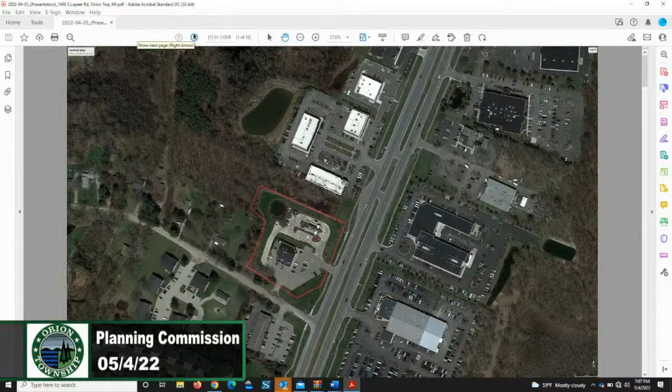Adequate public service: because we are not proposing any expansion or increased use of the building, it's just adding a drive-through window to an existing use. We don't believe there will be any uptick in demand for any of the existing utilities that service the building. Impact on traffic: we're adding the drive-through to this site, but it's an existing coffee use, so we don't believe there's going to be a significant increase in traffic. Once we get to the site plan, there's a traffic impact statement we are preparing, but we don't think it'll be a large uptick in traffic.

We've also designed the site to hold a significant amount of stacking spaces, even though we don't anticipate a ton of stacking. Generally, we have 11 within the lane, but this site could hold 30 if need be before it even gets to any right of way.

Enhancement to the surrounding environment: I wanted to share these pictures showing the site and the significant landscape buffer west of our site. This is a visual from South Lapeer Road looking west. We'll be maintaining that existing buffer so neighbors further west won't be able to see the drive-through lane whatsoever. This is another view from Casimir. We'll be adding a few landscape islands on the site to enhance the environmental aesthetic.

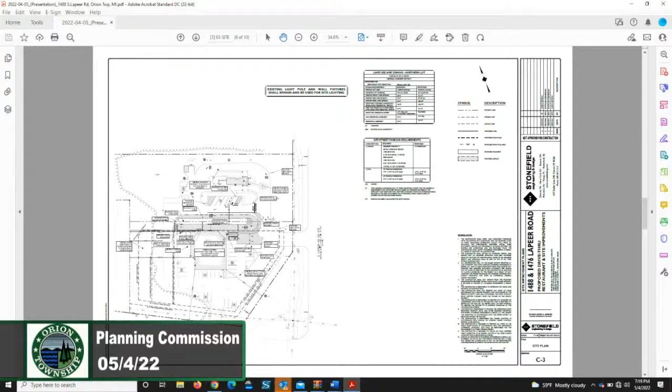What we're anticipating is these users peak at different times for parking demand. Generally, the coffee shop will be busiest in the morning, around 8:30 to 10 o'clock, as people head to work, while the Coney Island and pizza place will be busier at lunch and dinner times. The dog groomer in the middle is a low traffic and low parking demand generator, but fairly steady throughout the day. That's why we believe the 6 spaces we are short will not hinder the site from a functionality standpoint.

Comment 7, the maximum height of the building will be included. Just a point of clarification on comment number 7: both parcels are under the same ownership, so we will be able to get the easement for cross-access, allowing the southern property to circulate through the northern property and vice versa.

Truck turning exhibit - this came up on both the Giffels-Webster and OHM review letters, and I'd like to point out a few things. This is a truck circulation exhibit for an F-150 Super Cab, the largest F-150 they make. If you notice in this area, there is a slight overhang for the truck to make that turn. We would like to keep it as is, because reconfiguring it and pushing the striping further south would eat into our parking.

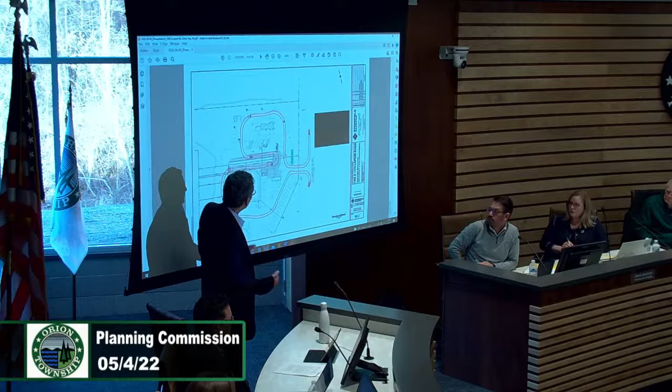The other thing, if you don't put an island here, if I'm coming in here and I know there's a drive-through, what am I going to do? I'm going to drive right through here, and someone's going to be coming into this queue that would have gone all the way around. They're looping around doing the right thing, and this person comes and just cuts them right off.

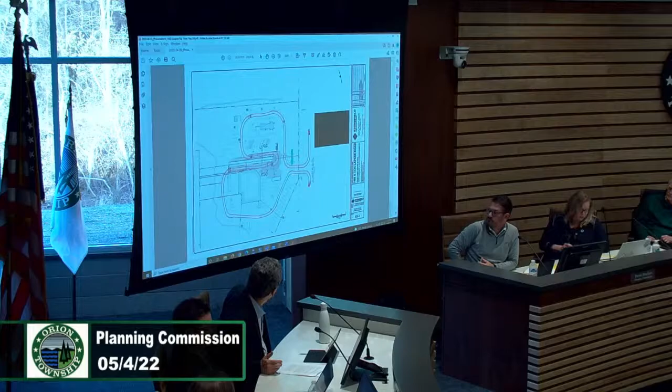It just doesn't seem like the type of operation for a drive-through that is customary, but I think it's solvable. I think some redesign of this could modify the turning radius, add the island. I don't think it kills the project. I think it's just some minor modifications that would improve the flow and also improve the landscape screening, and we think potentially enhance safety in the area.

Now, under Planning Commission waivers, some of these are waivers, some of them are discussion items. The parking spaces is one. The other deals more with a discussion regarding the landscape standards, whether you feel that all the standards are met. A lot of things aren't being changed other than some of the trees that are being removed for the drive-through and the need for screening, but that's just something for your discussion.

Then number 12 on our item talks about the 2 lots used for circulation. This requires your approval. And then finally, special land use standards that are included. Those, in fact, should be reviewed as part of your deliberations to determine whether or not this proposal meets the special land use standards that are in your ordinance.

So that's a summary of our comments. I'll be happy to answer any questions. All right, thank you very much. Would like to turn it over to OHM for their review.

Thank you, Mr. Chairman. Our letter of April 27th came to the similar conclusion that the plan was not in compliance with the township ordinances and engineering standards. We did list out 12 items that needed to be addressed. I'm happy to hear the applicant is willing to address all of those, 2 through 12.

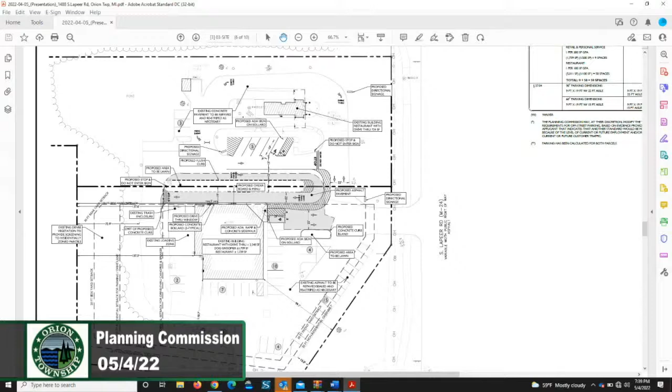I echo similar concern of the current traffic flow pattern around the building. I understand it's an existing location, and everyone here, including the developer and the occupant, is trying to look at the least impactful improvement to add a drive-through. Although I still find it necessary to provide similar stacking to all other drive-throughs in the township, because even though there isn't traffic data specifically for Lava Mountain Coffee, we've seen plenty of other locations where inadequate stacking creates detrimental traffic patterns we want to avoid. So that's a huge issue for me right now.

I would much rather see a permanent island provided, so you gain additional stacking spaces that allow the proposed signage to be moved out further, creating more wait time between order and service if desired. Since traffic patterns on that site already go to the right to support the Coney Island, I don't see a major issue with having the coffee area follow the same sequence, and then providing an adequate turning radius.

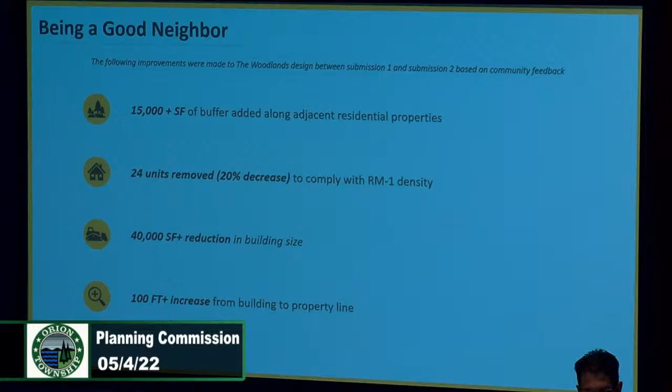So this led us to continue to listen and improve our plan, and we have worked very hard to do so. In our most recent revision, we have added an additional 15,000 square feet of buffer space. This is specifically along the west side of the property line. This was our smallest buffer before - it measured only about 11 feet, and we've quadrupled that buffer to be a total of about 40 feet now.

We've also relocated 32 of our units to the east portion of the site, moving some of the residential closer to Lapeer Road, closer to that high traffic area and away from the residential uses. This was a specific aspect of our redesign that was well received by board members. We've also reduced 50% of the building footprint to 2 stories, so I have a lot of detail on that, and I will come back to that in a moment.

While we were very excited to bring a restaurant to Orion Township, we understood that added some complications, specifically creating a significant amount of traffic. Traffic is a very important topic and a big concern of both the Planning Commission and community members, so we decided it was in the best interest of this project to focus on what's most important to us and what we feel is the most important need in the community, being residential housing. So our newest proposal is purely residential, and we've eliminated that restaurant.

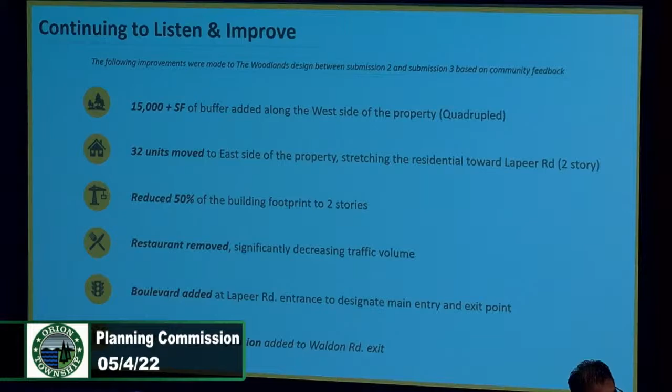We've also added a boulevard at Lapeer Road. This designates this as our main entrance and exit point, so as to keep traffic flow moving towards Lapeer as opposed to Waldon. Furthermore, we took the Waldon Road exit and made it a right turn only, so no traffic will be moving from exiting the property toward the Lapeer and Waldon intersection. Any traffic exiting onto Waldon will be making a right turn moving away from Lapeer.

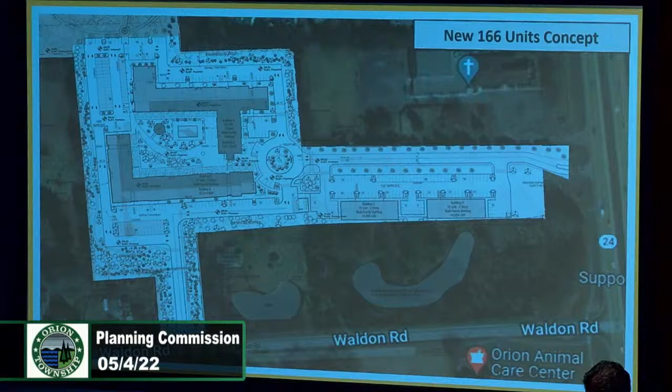As I mentioned, Woodlands has the appearance of 2 stories from its surroundings. The way we accomplished this was using the design you see on screen now. On the outer perimeter of the building, we added the 2 stories, and that connects to the 3-story portion through a large pitched roof, which effectively shields the entire 3-story portion from all the surrounding areas.

The only way the three-story portion is visible is from the interior courtyard area to the rest of the development. None of the neighboring properties will view that three-story aspect.

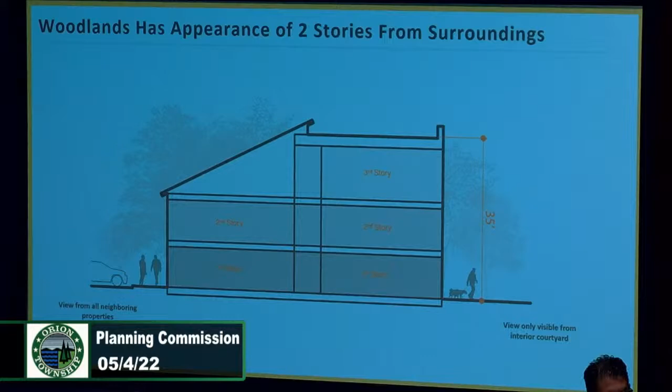This is a 2.5-story design, and it's 35 feet tall. The rationale is that 50% of the building is 2 stories and 50% is 3 stories, and so without a clear definition in the zoning ordinances that we're aware of, this is considered 2.5 stories.

But what does that look like in real life? What we've identified here is a rendering of what the 2-story side of the building will look like to all surrounding areas. As you can see, there's really no visibility whatsoever of a 3rd story.

This entrance here is from the end of the Waldon Road entrance, so this is already 350 feet off the road, looking directly at the building from the entry point. This would be the vantage point.

From all the neighboring properties, there's a 5-foot-high buffer and a significant amount of landscaping added to those areas. So if you could even see through all that, this would be your view of the building. We feel this mass and scale is much more conducive to the area than the previous 3-story design.

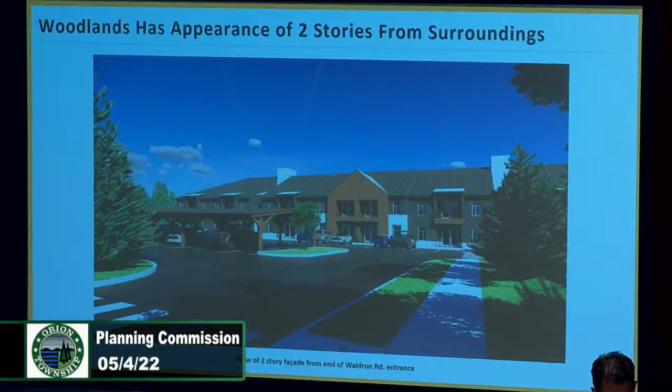The look and feel of the Woodlands is something we're very proud of. In the upper left rendering, this would be the view as you enter from Lapeer Road. This driveway is about 750 feet long, so it's more than 2 football fields going from Lapeer Road into the Woodlands. You can hardly see the building from the road.

As you're driving in, the 2-story buildings I referred to would be to the left. The rendering in the upper right corner depicts those buildings. As I mentioned, they are adjacent to the nature area and the detention pond to the south, and they provide the same finish quality and access to all the same amenities, but it's a slightly different product. So as opposed to a common hall elevator building, it is a 2-story walk-up building, which gives a little more versatility and flexibility to the development compared to the previous design.

Once you get to the end of that 750-foot driveway, you're greeted by the roundabout circle there. Behind that is the main leasing office, amenity space, and then connected to the 4,000 square foot outdoor amenity space just beyond the building.

And if you were to drive into the development from Waldon Road, what you'd see is what's in the bottom right corner. At this driveway, we're about 350 feet off of the road, so again, over a football field away from the entry point, and as you're driving in, this vantage point of the building is 2 stories.

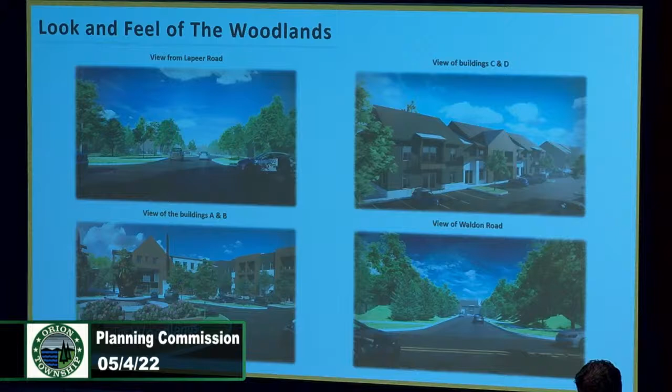As mentioned in some planning reviews and at previous meetings, we haven't given a lot of detail on what the exterior facade materials of the Woodlands will feature, so we wanted to do that tonight.

The brown and charcoal colors that you see are a natural wood grain composite siding. This is a really tremendous product called Diamond Kote, made from aspen pine. What's unique about it is that it's one of the most durable wood materials they can create composites from. It starts at about 4 inches thick, and they compress it down to just about 3/8 inch. It's much more sturdy than fiber cement board and a lot more durable, so it's extremely high quality.

It also comes with a 30-year no-fade paint guarantee, meaning they use mineral-based paints so over time there'll be no sun fading of the facade color. Again, very high quality, very durable material, and we think it gives a really great aesthetic to the building.

In addition to the natural wood grain composite, we've also included some stone accents to break up the facade and give it a bit more depth. We're considering Fond du Lac natural stone for this portion of the building. Also wanted to mention that nearly every unit in the Woodlands does feature a balcony—there might have been some confusion at our previous meeting that there were no balconies, but nearly all the units do have balconies with railings like you see in this rendering.

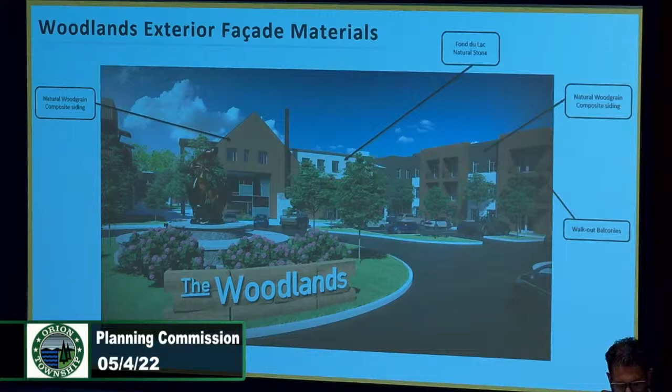We thought it was important to update our shadow study following this latest redesign. With 50% of the main buildings being 2-story, it further reduces the shadow created by the building to the point where it's almost unseeable. As a result, it shows that the Woodlands creates no sun screening on adjacent residential uses, regardless of time of day or season. That was a concern some of the public shared at our public hearing, and we wanted to make clear that shadows should not be a concern with this development.

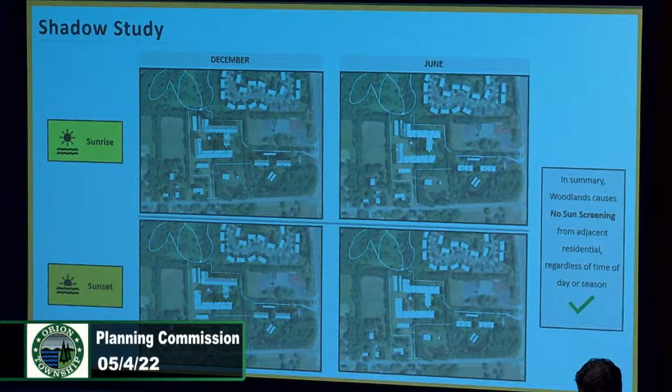There's also been some concern that the Woodlands overburdens public infrastructure. This was something we shared last time, but I don't know that it was fully understood in terms of what we were saying, so we wanted to provide a bit of a visual here.

First, beginning with stormwater management: we had Stonefield Engineering conduct an analysis of the existing conditions of the site compared to the developed conditions, and what the water discharge rate looks like in each instance. In the developed case, there's an 80% reduction in the discharge rate of water from the site. The reason is the current site has roughly a 3-foot grade fall from the north end of the property to the south end. Being natural land, water flows wherever it pleases, and the path of least resistance is toward the houses on Waldon Road to the south.

That could certainly be leading to some of the flooding issues that adjacent properties are currently having. In the post-developed environment, we're creating a largely flat surface utilizing a stormwater management system and a retention pond to manage the water. So the water goes from flowing wherever it wants to going through a stormwater management system and being discharged into the retention pond and eventually into the city's stormwater management.

As it relates to water and sewer capacity, it's been confirmed by the township's Department of Public Works that there is adequate capacity in both sewer and water systems. In that respect, the development poses no threat to those systems.

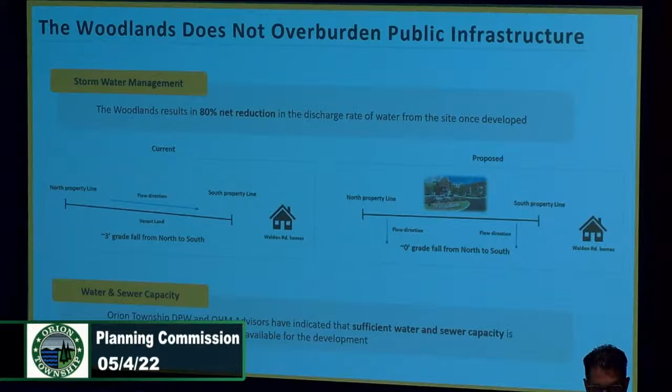Traffic has been a highly discussed topic about this project. Our latest design reduces the amount of traffic proposed compared to the original by 60%. The reason is the original design had 190 units, a 4,000 square foot restaurant, and a 14,000 square foot office building. When you add in all those different uses, you get a much higher total amount of trips compared to a purely residential use.

In the case of the original proposal, our total AM and PM peak traffic was 383 trips, compared to the new proposal's 154 trips. So compared to the original amount of traffic volume, we've reduced that by 60% with the new proposal.

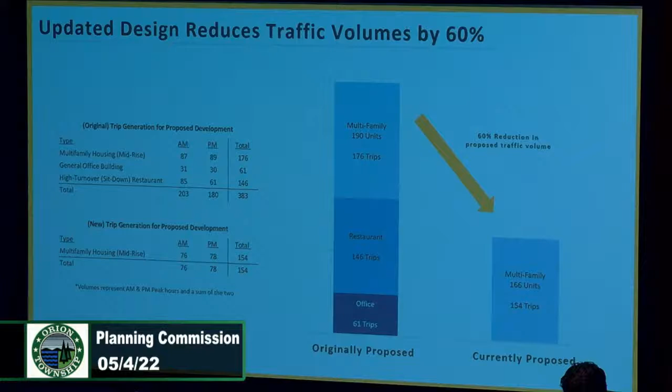When we take this a step further and compare the proposed amount of traffic to what's currently approved on the site, it's actually less than what is currently approved. The conditional rezone that provides for the restaurant and the car club or office building creates in total 61 trips from office and 146 trips from restaurants, while the current proposal with 166 units only produces 154 trips. So we're actually reducing what's currently approved on the site by about 34%.

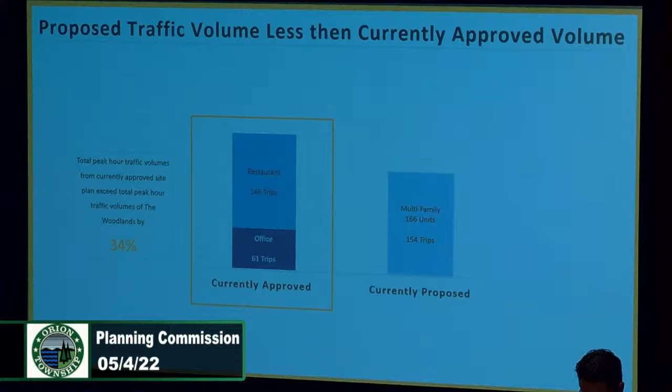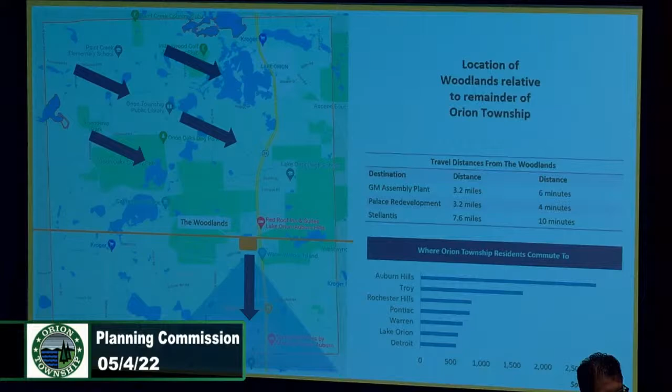We mentioned this last time, but we'd like to reiterate that we feel the location of this project is actually a strong benefit to the site. While other sites could feature multifamily elsewhere in the township, further north, the Woodlands sits immediately adjacent to Lapeer Road, the busiest road in Oakland County, and everyone goes south to work. By locating the Woodlands in the lower third of the township, we're preventing hundreds of cars, 154 cars in this case, from needing to go through downtown or other already congested areas. They get to head straight south from Lapeer Road on down, so we think this is actually the perfect location.

As it relates to existing supply, we all know it's full, and since the last time we were here, it's even more full. We just checked this today before coming in, and there is not a single apartment available at any of these 6 locations, according to apartments.com, as of 4 o'clock this afternoon. None. The first one available is in June. Apartments are tremendously important to the further growth of Orion Township, and the Woodlands delivers exactly that.

The other thing the Woodlands does is bring a new product type. I want to reiterate this because there is nothing like this in the township. It's going to help retain a lot of that young talent that may be heading off from Orion Township to other areas of Oakland County that feature higher amenity properties, because those options don't exist here currently.

But it's not just the younger demographic. This would be one of the only developments other than in downtown Lake Orion that would feature an elevator in an apartment complex, so it could certainly attract an older demographic looking for the amenities and the natural landscape, a 14-acre or 12-acre nature preserve to enjoy. It would attract those residents as well. We feel it's really important to the future of Orion to get a project like the Woodlands that attracts this younger demographic but also benefits other demographics.

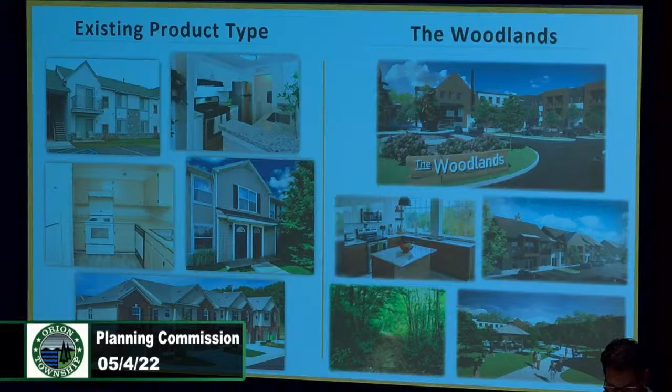It's also extremely high quality. Some of the existing product in the area may not fit that same description, but the Woodlands would be sort of a best-in-class asset in the area, and we think that's important to remind the commission of.

We've been told a number of times, particularly in our last trip to Planning Commission, that there's no recognizable benefit of the Woodlands. Section 3003 states that a PUD should result in a recognizable and substantial benefit both to the residents of the project and the overall quality of life in the township, and it lists 7 items. When we look at these, we somewhat scratch our heads to understand how the Woodlands doesn't fit them.

Looking at preservation of natural features, we have over 12 acres of preserved nature on the land, something no other apartment community in Orion Township or even the rest of Oakland County can offer its residents. We've identified the gravel pathway that enters from Waldon to the nature preserve as publicly accessible, so we plan to fully allow all neighboring properties and other members of the public to enjoy this community amenity. We also plan to pursue a conservation easement on this land, so there's no question of our intent in the future. By providing a conservation easement, we're effectively eliminating the potential for this 12 acres to ever be developed on. We see this as a huge benefit to the township.

The second item is preservation of historic buildings. Of course, we have none, so this is not applicable.

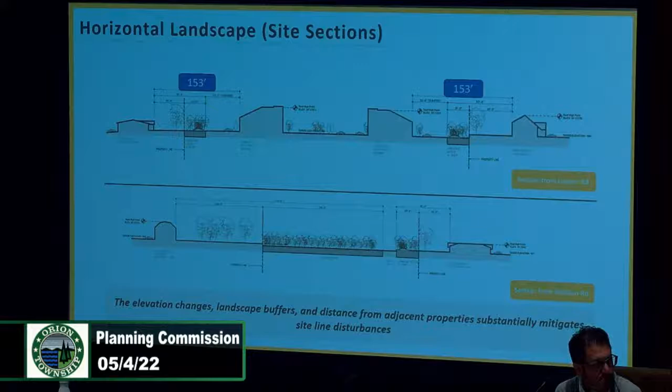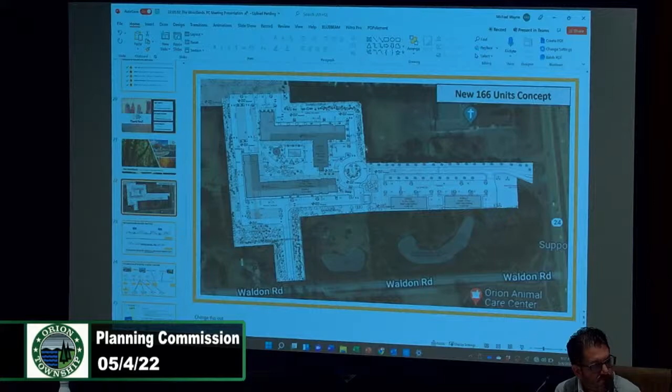In this area, the distance is a little small to read, but it's about 35 feet, and that would be the same for the school and the church there. The school zone is not identical, but the school buffer zone is about 40 feet.

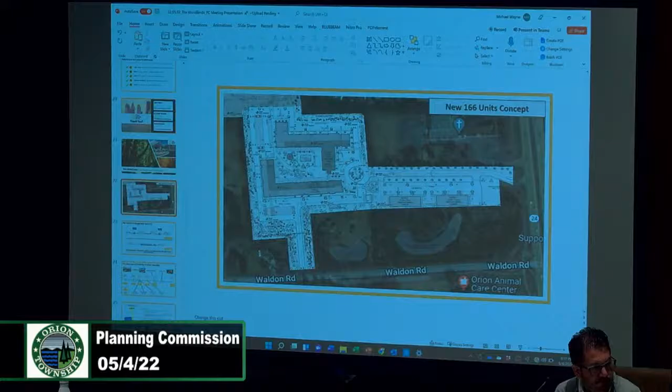Hi, my name is Kim Hunter, and I live at 310 Waldon Road. My opinion on the development really hasn't changed since I first came up here and spoke. I still vehemently oppose the Woodlands PUD project. I'd like to reiterate some of my concerns as well as touch on a few different ones. Obviously, traffic and water is the same concern that you guys have.

I have 4 children, and with the proposed drive directly next to my property, it definitely brings my concern of their safety as my top priority. We all know that traffic, especially during school times and bus stops, can be extremely scary. We've had several instances making that right turn onto Waldon. While I can appreciate them trying to defer some traffic, making that right turn out of the complex still sends them directly in front of my house with their peak in and out times during peak hours, which is bus stop times. That doesn't really deflect the traffic from our properties.

The other issue I have with deflecting it, the whole Waldon 24 intersection, no matter which way you look at it, it's got a D rating. It's not great. But then you deflect the traffic to 24. They're turning right onto Waldon to go southbound. We're also trying to turn right from Waldon to go southbound. They're coming out of their complex. We bank on that light at Home Depot every single day to turn red to get out. If we have both of us turning, no stoplights, it's not going to make that traffic intersection any better.